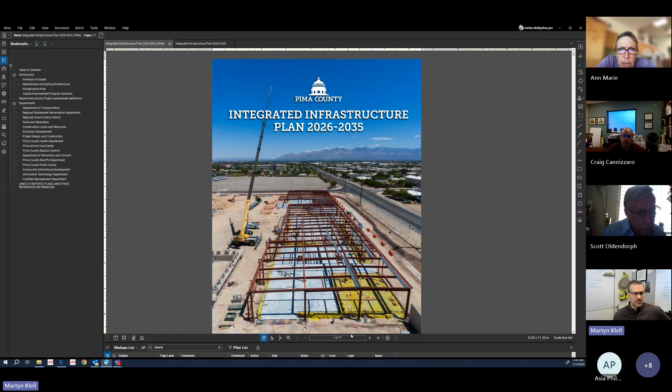And then it gets into a little more detail on the integrated infrastructure plan - oops, I went to the end, I apologize. The next section is an overview by department or area, so you can see transportation, regional wastewater reclamation.

You get into most of public works, but there are a few others that are a little unique, like economic development, attractions and tourism, and a few elected officials like the sheriff's department and facilities management, which is the bulk of the buildings. There's also project design and construction, which is kind of a catch-all for elected officials that don't have a project management resource, or have really small needs - in other words, don't have a 5 or 10-year integrated infrastructure plan need. So they fall into these categories.

After that, it gets into each department specifically, so you can see their total project cost for the 10-year period, how many projects there are, how many are funded versus unfunded, and the percent of projects unfunded. You can see an indicator here.

So the intent of the Integrated Infrastructure Plan is to show typically projects that are not currently underway - so they're not currently in either design or construction phase at all, and most of them are unfunded. There are a few outliers, as some departments develop their 5-year plan and put projects in there that are funded.

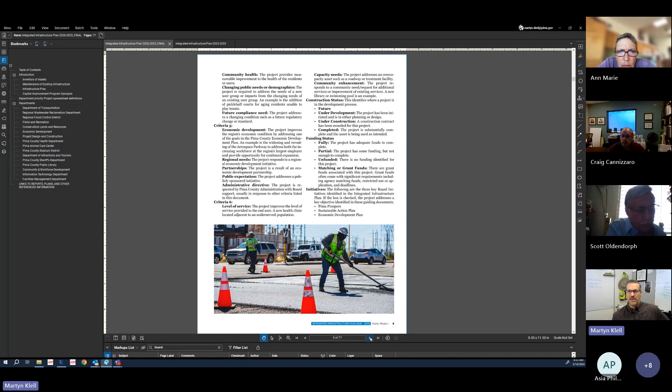Some of that has impacted quite a few of the departments' ability to fund projects. They're having to reduce the number of projects to get them funded.

The next section, which is the largest, is the department section. Each one of the departments within the plan is listed, and each has their own section. Transportation is first. They're all structured the same way, talking about who the department is, a bit of background, the services they provide, and their own prioritization criteria if they have different needs—they're all unique in their own way. They've developed their own prioritization criteria based off the one set up for the entire plan. Then it gets into their priority projects, those costs, and any limitations.

A snapshot up top shows their current infrastructure, and then their priority projects, ranging from a couple up to 10, which is where we've capped it, along with the general years. After that, it goes into a spreadsheet showing the 10-year plan with the project name, funding for each year, total for the project, and total by year. In the corner is the total cost of that 10-year plan by department.

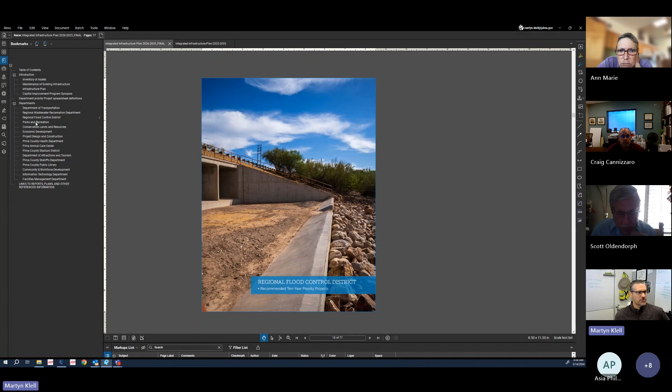It goes through each of the departments. I won't go through each one, but I'll click through so you can see: Flood Control District, Parks and Recreation, or Conservation Lands and Resources Department—a new department that broke out from NRPR and merged with the Sustainability and Conservation Office—Economic Development, Project Design and Construction, the Health Department, Pima Animal Care, Stadium District, Attractions and Tourism, Sheriff's Department, the Libraries, Community and Workforce Development, IT, and Facilities Management.

I believe that's a high-level overview. I'm available to answer any questions if anybody has any specific questions on it.

Great, do we have any questions? Thank you for that presentation.

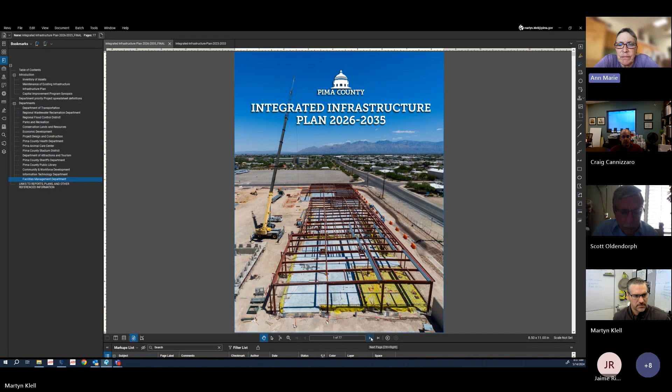Actually, I have a question because I am kind of confused by the spreadsheet that's in the document versus the spreadsheet Jaime just showed us. But actually, Asia just raised her hand, so let's take your question first.

Oh, okay, thank you Ann Marie. I guess I have a couple questions. One is probably along the lines of where Ann Marie was going. The other question maybe is what I'll put now. If you had any general thoughts about obviously the purpose of this type of a plan, right? It pulls everything together, and I was wondering if you see any sort of crossover issues, or things where like the Canoa Ranch and NRPR where wastewater and other departments might have projects that are somewhat dependent on each other.

Yeah, the document is very useful for that. As large as we are as a county, with the many projects going on, I'd like to say we have good communication between departments and they coordinate. It is an opportunity for somebody to catch something that might be missed. You're right, there's a Canoa campground project going on right now, but they have a challenge with their sewer getting connected, and that plays into the projects that Jaime's working on right now.

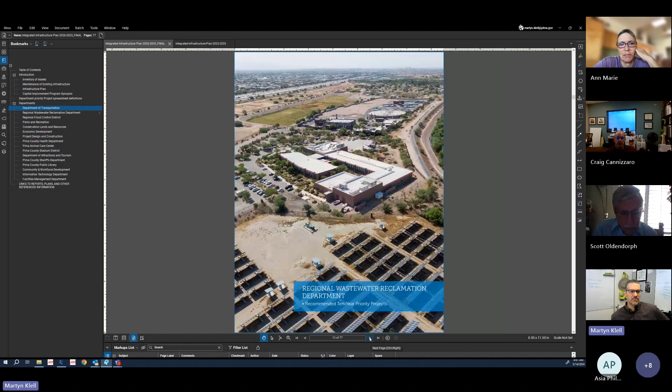Since the bulk of these projects—the intent of this is to show future projects for planning—they hold those projects off. So what we're afraid of is somebody would see, for example, oops, I did it again, I'm sorry. They would see, for example—and I think wastewater is the good one—they would see a number on a year here, for example, at the bottom, and they would have funding, but then they would also see what was currently adopted in the budget, and they would be doubling up that number. So we didn't want people looking at this document—it's intended to look at the budget, the five-year integrated infrastructure plan, which is the current budget, and the 10-year together. We didn't want people seeing those separately and seeing a funding shortfall.

So I'm not sure if that makes sense to you or not. Jaime, you might be able to explain a little bit better on your project specifically.

I guess because we're enterprise funded and you all are looking at the 5-year program, and noting that's a good way to go, our funding is accounting for that 5-year. Beyond the 5-year, that's planning, and we're not budgeting for it. So this is intended to show projects that are not in the program because it's too far out. We cannot see that we need a particular need beyond the 5-year program. So if you cut and paste the 5-year program here, you'll see the whole thing. But because the 5-year program that we're just reviewing is basically our path forward, and we're funding it, we're committed to fund that series of projects and rehabilitation and repairs.

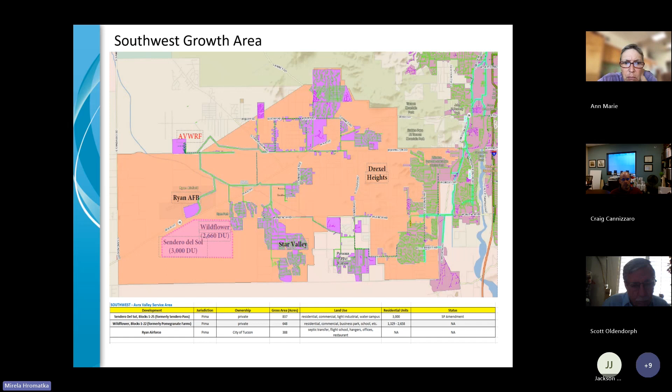Also, Ryan Airfield is another potential site. They plan for expansion of their services and operations, which will expand and support the economic base in the region. A few years back, three developments got together to build a new interceptor line that will support services for Wildflower, Sendero, and Ryan. Moving forward to the next growth area.

This growth area generally encompasses the area around Tucson International Airport, expanding north to and along I-10 and Benson Highway. It also includes a portion of Southlands. I'll talk more about the Southlands in the next slide show.

These are in Old Vail Connection Road, called the Aerospace Corridor interceptor line. This line will provide services to all development along the Aerospace Corridor. You've probably heard of the American Battery Factory that's moving in, and I believe the development is currently under construction. This is a big economic development for the county.

Currently, or recently, completed Old Nogales Highway Interceptor will also provide additional capacity to Raytheon and, like I said, the TIA expansion. To the south, we have Verano Section 10.

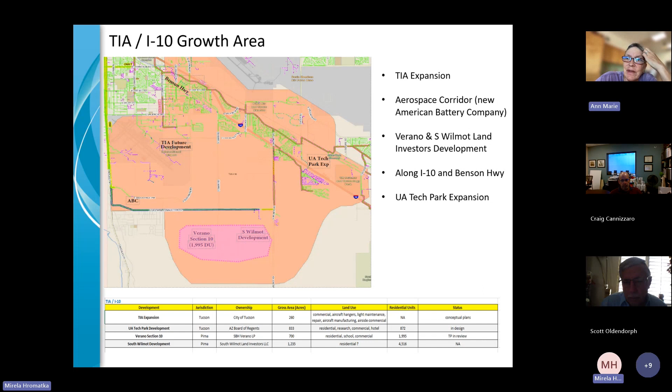Did we lose her again? Let's see, yeah, I'm not hearing anything. Did we lose Mirela again? Are you there? Yes, did I get disconnected or something? Maybe it was just me. Oh, I'm sorry, can everyone hear me now? I think it was just a software update type of thing. The last thing we heard was about the U of A Tech Park, can you hear me? Yes, now we can hear you, Mirela. We stopped listening after the U of A Park presentation slide.

Okay, so the U of A Park. All right, so the next slide, I'm here at the Southlands. Can you see my screen here?

So the Southlands has large tracts of state land just east of Wilmot Road and south of I-10. As you can see, there is not much infrastructure available, and master planning will be required.

Currently under review is a plan amendment for Rincon Southeast Sub-Regional Plan by the City of Tucson. The city plans to make changes to land uses to increase urban densities, allow more development, and attract new development in this area. So this area around the fairground has potential for more development.

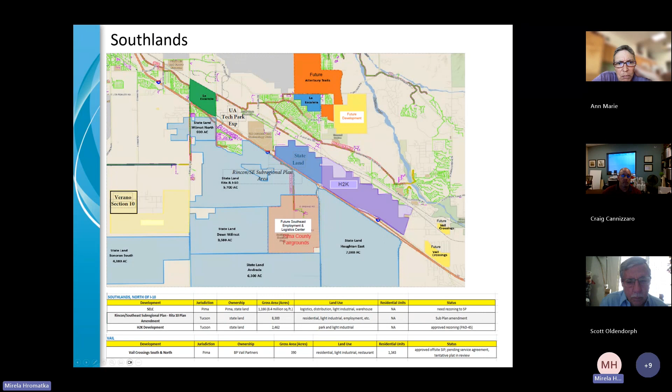Let me see what else. So to the far southeast, you'll see Vail Crossings. This is a residential development. They're going to be constructing a new gravity line, 4 miles in length, to provide services to this new development. That is also an anticipated new service area expansion area. And that would be all for that growth area.

Also, Rincon Valley is another growth area identified in Pima Prospers. You're familiar with Rocking K development, currently underway with remaining blocks under construction. Another big development, where land was currently rezoned, is Atterbury Trails. Over 12,000 units of development will happen in the next 20-25 years.

This area is serviced by Pantano Interceptor and Southeast Interceptor. Currently, we have meters set up to monitor flows in Rocking K, and we anticipate our modeling group will do some evaluation on capacity to establish triggers and timeline for augmentation anticipated in the downstream section of SEI and PTI.

Other smaller developments are planned. You can see the orange polygons indicate each new development area. These are connecting to PTI, Pantano Interceptor.

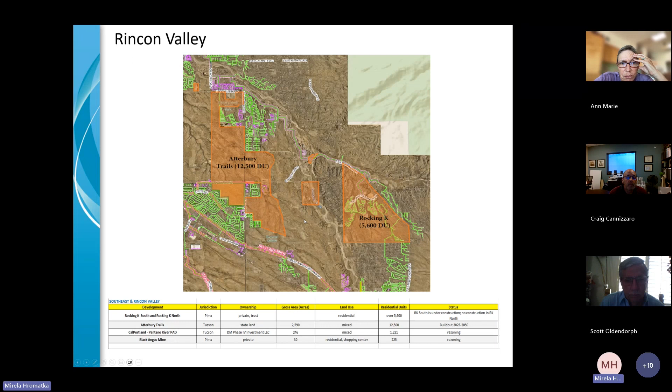So Green Valley, in the Green Valley service area, we have Quail Creek and Madera Highlands. These are developments on the east side of I-19, currently under construction with allocated capacity.

On the west side of I-19, as Jaime mentioned, Canoa Ranch and the Canoa Ranch new interceptor line will provide service to the remaining blocks of Canoa. Design will also allow connection of Arivaca Junction to this line. That would be it for Green Valley.

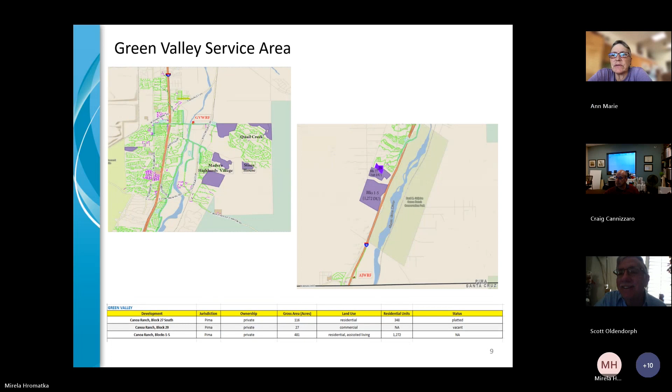Okay, on the northwest, Marana, you're showing a new development there called Cascada. I'm not aware of that. I've been seeing the dramatic growth around Marana Center and other areas. How large of an area are they planning, and how many? I assume that's residential and all that. How large is that planning on being?

Yeah, so Cascada is everything, the whole yellow polygon. Previously it consisted of two specific areas, Cascada North and now they're consolidating into one development called Cascada 2. From the table down, you can see they plan for over 3,800 units in different phases, with commercial development around Twin Peaks and where Marana Center is. I believe this is where they're going to have commercial and other supporting land uses to residential development.

They will be doing this in phases, I believe four phases. Before that, they will need to sell each phase to different developers. And we are currently in discussion with the consultant working on the service agreement for this whole area.

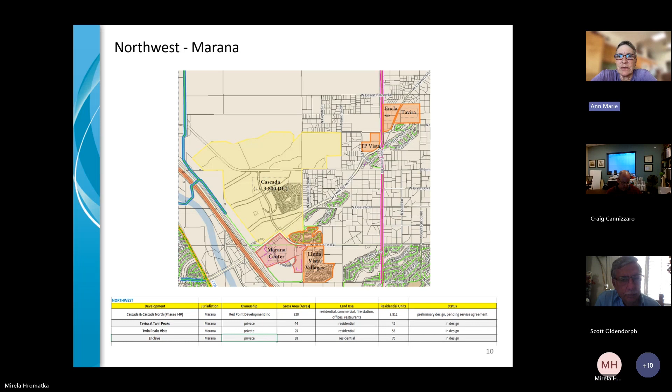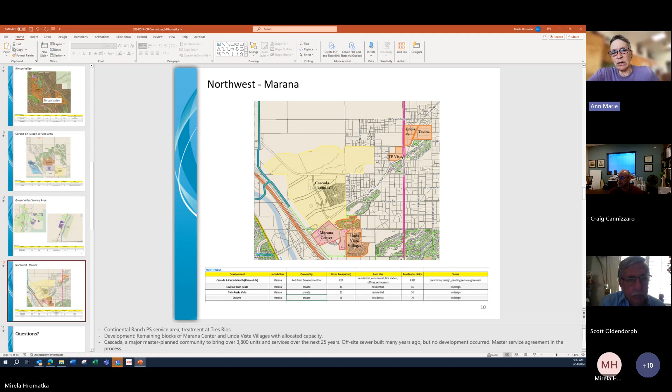Any other questions or comments, Mirela? Anything? Okay, well, if there's no more questions for her, then let's move on to our next agenda item, which is our schedule. Traditionally, we now won't have a meeting until December, January timeframe, when we review the capital improvement projects for the next fiscal year budget.

Honestly, I don't remember. I think we usually just say we'll have it in that December timeframe because we want to get it to the full committee so we can review and support the projects. So any comments on the timeframe, Jeanette, for our next meeting?

Let me pull up the previous year. In 23, we had the meeting January and July. In 22, we had it January and May. So January seems to be about common for our next meeting, December, January.

So I can send a doodle around then and give you some potential dates. Does that sound good for everybody? Everybody's okay with that? Yeah, I think as long as we get it in January.

Scott Oldendorph's got no big trips on the agenda, so I'm open. Okay, that's good. Yeah, as long as we get it in January. I think February is a little late. So I think in some years we've even had it in December, but with the holidays, that's often difficult.

So let's, if you can send out that poll, December. Will do. January, that'd be great. Okay, all right, so future agenda items. We had a great schedule today. I mean, our next meeting we pretty much just focus on reviewing and looking in detail about the capital improvement projects, but is there any other future agenda item that anyone would like to include?